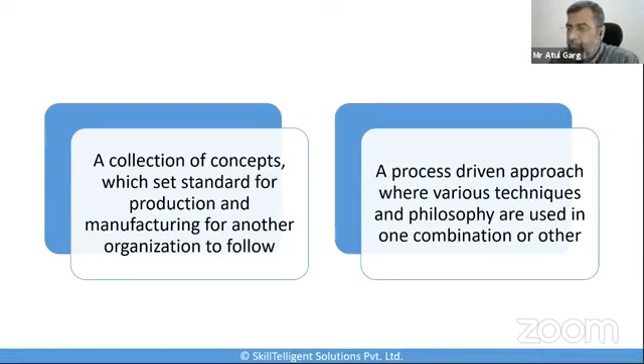Let's look at some of the best practices. World-class manufacturing tends to implement best practices and also invent new practices so as to stay above the rest in the manufacturing sector. The main parameters which determine world-class manufacturing are quality, cost-effectiveness, flexibility, and innovation. I think these parameters apply to almost every program meant to make you competitive. Whether it's operational excellence, manufacturing excellence, or world-class manufacturing, you will always end up focusing on quality, cost-effectiveness, flexibility, and innovation.

WCM implements robust control techniques, but there are 5 steps which make the system very efficient, and these are the ones you see on the screen. The first one is reduction of setup time and tuning of machinery. It's important that organizations are able to cut back the time in setting up machinery and also tune machinery before production.

The second step is that production processes should be divided according to their nature, with similar processes combined together - that's what we call cellular manufacturing. The third area is that the normal tendency of a manufacturing organization is to maintain high levels of WIP material. We know that increased WIP leads to more cost, while decreased WIP induces more focus on production and fast movement of goods. So the third area is reduced WIP material.

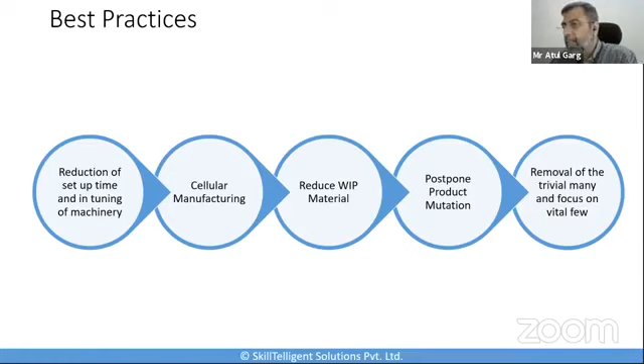A little bit of history: the term world-class manufacturing was introduced in 1984 by American industry strategists. They developed a model based on the study of Japanese, German, and American companies that had achieved performance levels beyond the known standards in their sector. Fiat developed this concept further in 2005 with the aim of improving the production system by reducing waste, increasing productivity, and improving working conditions.

Following these studies, a model for deployment of problem-solving tools, maintenance improvements, etc. was created. Hajime Yamashina, professor emeritus at Kyoto University in Japan, played a key role in the development of WCM. A 4-step strategy to achieve the world-class level by assessing the contribution of manufacturing activities to the competitiveness of the organization was developed by Fiat, Chrysler, Professor Yamashina, and so on.

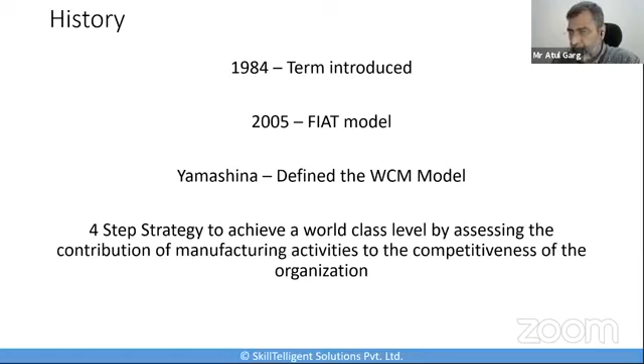As the Professor describes, world-class manufacturing requires total quality management as the brain, just-in-time as the nervous system, and total productive maintenance as the muscles. So in short, you need to develop a sustained ecosystem of excellent quality, delivery, and maintenance. That's in a nutshell what WCM is.

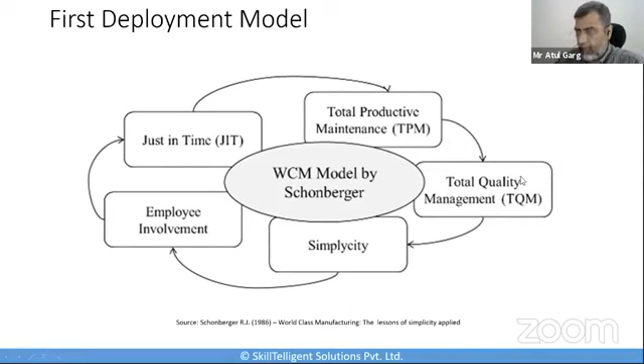Using this, there was a first model defined by a person called Schonberger, who established the first deployment model which could take you to the world-class level. Major components of this model were just-in-time manufacturing, total quality management, total productive maintenance, employee involvement, and a concept he called simplicity. So this was the Schonberger model.

Again, as we said a few slides before, WCM is a process-driven approach where implementation usually involves the following philosophies and techniques. I'll walk through some of these techniques.

Number 1, make to order. Second, streamline flow, small lot size, family of parts, doing it right the first time, cellular manufacturing, total preventive maintenance, quick changeovers, zero defect, just in time, and so on. These are the basic philosophies and techniques which have gone into building up the world-class manufacturing concept. I'm not going into detail because these are common concepts repeatedly used in different terminologies and philosophies.

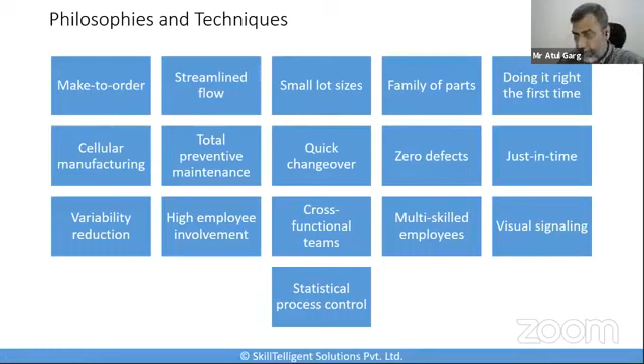Companies that have attained world class also acquire some common characteristics. Every WCM company is quality oriented without any doubt, and also has a flat organization. They're fast, flexible, and competitive in time. They remain customer satisfaction oriented, and these companies acquire an international perspective and constantly innovate in new product or service development.

World-class companies are also pioneers in technology. They create small units and continuously enhance the skills and knowledge of their employees. Continuous improvement is their way of life. These are some of the common characteristics which every WCM company ends up acquiring by default.

These companies adopt manufacturing organizational principles and focus on production requirements, representative manufacturing skills, automated manufacturing skills, and workforce skills. So that's another angle which these companies focus upon.

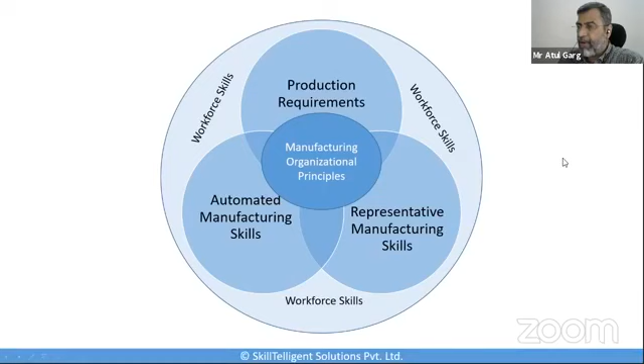Now let's talk about the 10 pillars of world-class manufacturing. To be world-class requires an overall willingness to establish closer connections with everyone, from customers and suppliers to workers, an unwavering commitment to self-analysis and improvement, and an aggressive approach to technologies that can help turn visionary strategies into gold medal realities.

As the WCM model was getting defined, they identified the 10 technical pillars of WCM. We'll talk about them quickly, each pillar I'll walk you through. The first pillar aims to reduce accidents at work, developing a culture of prevention, improving working conditions, and improving ergonomics. That's safety and health, the first pillar.

The second pillar is cost deployment. This is a priority in the WCM system because it helps in identifying the causes of losses, quantifying the potential benefits to save money, and putting in place the necessary resources by management. In general, it is about having real control of the losses of the company, and it is synergistic work between financial services and production.

Normally, in any large organization, the financial services and production usually operate at arm's length. But this particular pillar focuses on bringing them together and generating synergies between the financial services and the production area.

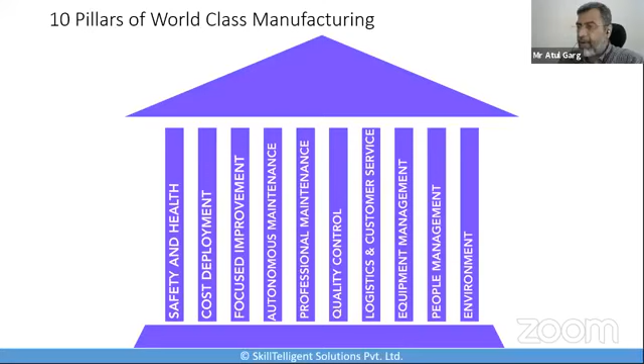The 10th one is the environment, which demands that companies respect environmental standards and develop a culture of cost reduction and energy losses. So these are the 10 pillars of world-class manufacturing.

As we go about implementing this, along with the 10 technical pillars, 10 management criteria or management pillars have also been identified to support these technical pillars. So we'll also quickly talk about these 10 pillars.

The first management pillar is management commitment. Commitment of management is an essential element to the success of any approach where you want to bring in improvement. Without this commitment, the project is doomed to failure.

The second one is clarity of objectives and KPIs. Each individual must be informed of the company's ambitions to understand their position, their role, and thus achieve their objectives.

The third one is route map to the WCM. The deployment plan must be built to make a clear link between the company's objectives and the actions on the ground. This is communicated and monitored by management.

Next is allocation of highly qualified people to model areas. Each pillar has a leader and a team dedicated to its implementation, and these people oversee creating and sharing know-how.

Commitment of the organization is the next one. Management and all the staff must be involved in the process. They must wish to see the problems and solve them.

Just one second. I think my video seems to be frozen. The video didn't freeze, sir. Yeah, just one second.

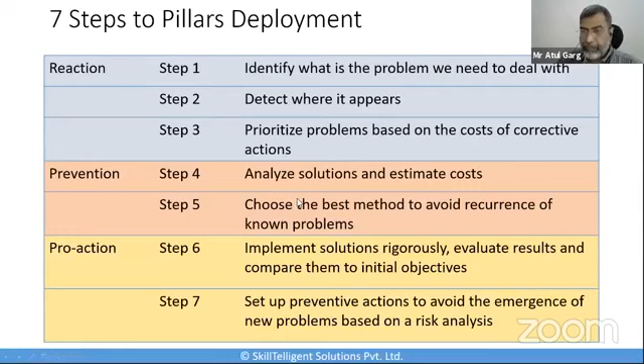Okay. Just a moment. Yeah.

So while we talk about these deployments, there are supposed to be 7 keys to becoming a world-class manufacturer. So let's understand these 7 keys. The first one is focus on the competitive quality. With constantly changing customer requirements, quality is no more a competitive weapon. Every organization has quality today. So we cannot say that my quality is better than others. You would go in the market and chances are you will find 2 products very close to each other in terms of quality. What separates a world-class organization from others is how much better you are than the rest of your competitors. So your quality has to now become competitive. So that's the first key.

Second, lean manufacturing is an overall methodology that seeks to minimize the resources required for production by eliminating the waste that inflates the cost, lead times, and inventory requirements. It also emphasizes the use of preventive maintenance, quality improvement programs, pull systems, flexible workforces, and production facilities. So implementing lean manufacturing is the second key to becoming a WCM. Companies with a lower operational cost structure will obviously enjoy the advantage in profitability and the ability to adjust pricing to meet competitive pressures if necessary to maintain or gain market share. So achieving cost efficiencies becomes the third key to becoming a WCM.

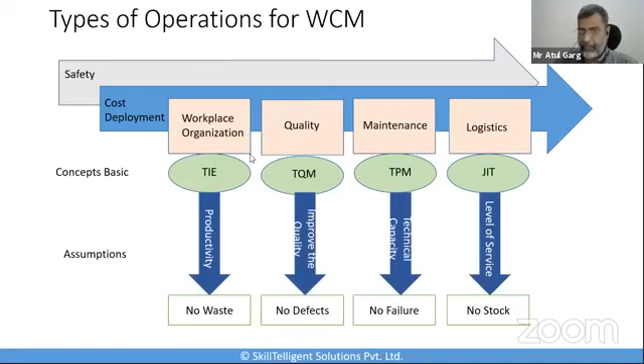So total industrial engineering. This is a concept which was identified by Professor Yamashina as a part of his WCM concept. It is a system of methods where the performance of labor is maximized by reducing Muri, Mura, and Muda, and then separating the labor from machinery through the use of sensor techniques. So the important part is, using industrial engineering, how do we improve the performance of the labor and how do we separate the labor from the machinery? Muri, Mura, Muda are the 3 important things which we talked about earlier in one of the webinars, how they help you cut through your losses overall.

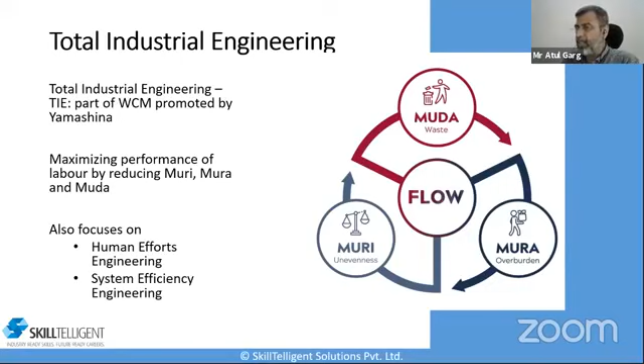Total industrial engineering also focuses on human efforts engineering and system efficiency engineering. Performance of the labor is the human efforts engineering, and separation of the labor from machinery is the system efficiency engineering. I'll cover this a little more in detail because this is not such a well-known concept. Most of the time people know TQM, TPM, JIT, but they don't know TIE.

So human efforts engineering would cover the principles of motion economy and motion study, work measurement, work sampling, ergonomics, safe work practice design, wage incentives, and job evaluation. And system efficiency engineering, on the other hand, addresses method study, methods efficiency, design, process and operation analysis, value engineering, statistics-based techniques, mathematical optimization, plant layout studies, engineering economics, and so on.

So these are 2 very important parts of industrial engineering, and having complete total industrial engineering is very important to ensure you have the right things which will help you improve the performance of your labor. So this is one component of WCM. Let's look at the second component, TQM.

TQM, total quality management, can be summarized as a management system for a customer-focused organization that involves all employees in continual improvement. It uses strategy, data, and effective communications to integrate the quality discipline into the culture and activities of the organization. There are 8 principles of total quality management; people use different words, but the concepts remain the same. First, customer focus. Second, total employee involvement. Third, process centered. Fourth, integrated systems, then strategic and systematic approach, continuous improvement, fact-based decision making, and communication. So these are the 8 principles of TQM.

I'm not sure whether you noticed one thing. Fact-based decision making, or the factual approach to decision making, is a very crucial part of the TQM as well. Okay, so that's TQM, which is the second component, or the type of operation which makes the WCM.

The third one we very recently talked about is the total productive maintenance, and TPM is a holistic approach to equipment maintenance that strives to achieve the perfect production. TPM aims for no breakdown, no small stops or slow running, no defects, and no accidents.

Again, TPM also has got 8 pillars, which are autonomous maintenance, planned maintenance, quality maintenance, focused improvement, early equipment management, training and education, safety, health and environment, and TPM in administration. So that's your TPM.

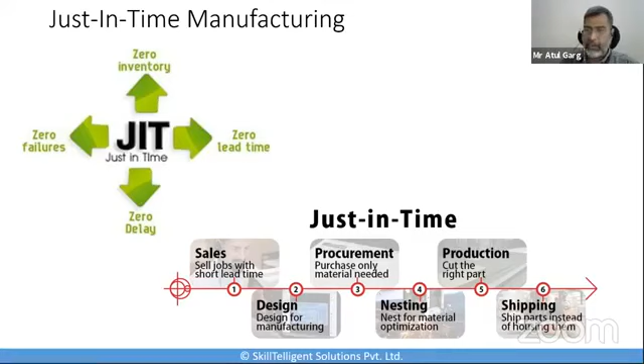I'm picking up a concept which we used earlier also in the Kanban. So when we talked about the Kanban, we had talked about a concept called the CONWIP, which is the constant work in progress. This system is more like the actual idea of using the supermarket shelves, where the Kanban is the actual location on the shop floor. So when a process removes the product from the previous process, the empty space is the Kanban, and the previous process will work to fill the hole.

So this system works very well for systems in which you can achieve near to one-piece flow and within which variation is limited. However, it also can be used very successfully within those areas in which there is a large amount of variation if combined with a make-to-order type approach to the planning. So the CONWIP or the Kanban type CONWIP is another factor which works along with the JIT. It's part of the JIT itself, and that also has to be part of your WCM overall.

So these are the 4 things which we talked about. So to build a proper world-class manufacturing, the concepts and methods of the total industrial engineering, total quality management, total productive maintenance, and just-in-time manufacturing must be deployed with focus on productivity, improvement of quality, technical efficiency, and level of services. These approaches should always result in zero waste, zero defects, zero breakdowns, and zero stocks.

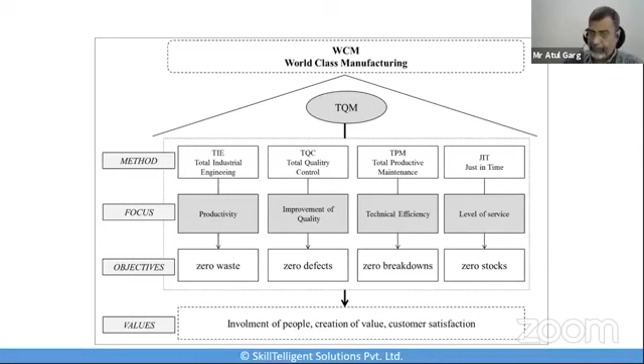So I was asked this particular question by somebody somewhere: are there any kind of levels of this world-class manufacturing? Yes, there are. So Fiat Chrysler Automobiles actually has developed a structured WCM audit mechanism. In 2005, they were the first one to start recognizing this as a structured approach of implementing WCM into their own thing. In 2009, when Chrysler joined Fiat because of the purchase of the majority of stakes by Fiat, they also went into this, and WCM actually became a turnaround story for Chrysler.

So what they did is they have also come out with a world-class manufacturing structure, and they have defined the 4 levels of world-class manufacturing. They rank them as bronze, silver, gold, and world-class. The main parameters which determine world-class manufacturers are quality, cost-effectiveness, flexibility, and innovation. We have talked about it earlier. I'm just repeating that again.

World-class manufacturers implement robust control techniques, but there are 5 steps which will make the system very efficient. The evaluation here is done on a scale of 1 to 5. Each node meets a specific criteria, and each technical pillar and management criteria is evaluated using this scale.

Okay, adding the scores results into a medal. So the first level or the first medal is the bronze medal, which requires a score of 50 to 59 points. At this stage, if you're in a bronze medal, you should be able to demonstrate significant gains and create a know-how on reducing the cost and problems. For example, you should be able to say that I'm able to reduce my quality problems by 3 times, I'm able to reduce the cost by 10 to 20%, or my lead time has been reduced 2 times. So that's the first level of the WCM overall.

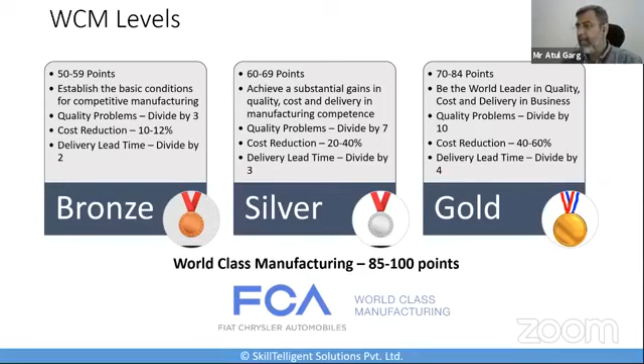Okay. The last level is world class with 85 to 100 points. What this will mean is that the company has reached a higher level in our industry, and it has become benchmarkable. The company has successfully rolled out the entire process across the company, and gains are widely visible. And now other companies are able to benchmark against us and say that if this company does it to this level, I am at 40, 50, 70, 80% of this particular company. So we become the benchmark. So that's the fourth level, and that's where you are truly a world-class manufacturer. Okay.

So there are several tools to measure and record the progress, and since WCM influences all the production and logistic processes, there is a complete audit system and measurement with the relevant indicators which have been identified. The main goals remain to maximize the production system results within the framework of the logistics program and in accordance with the assumed quality goals, and to strengthen competitiveness through the continuous evaluation of the production system so as to eliminate the losses in all the processes. The scope of no losses should include no accidents, no defects, and no failures. And the third goal is continuous improvement of skills, competency, and knowledge of employees, which is necessary to solve problems by means of WCM methods and tools.

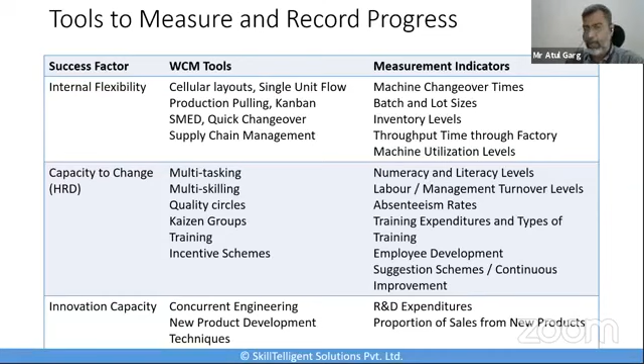Okay. Now, this is another angle which has come in. So there obviously cannot be an absolute world-class manufacturing standard because each industry is different. Okay, so the WCM opportunities will vary enormously from one industry to the next. So I cannot just say that I am the best. I'll have to judge my company's performance against the other companies and do a benchmarking.

That's where the world-class manufacturers with a score of 85 to 100 actually become the benchmark for the other industries to go by. So, the best way to score the checklist: we have got a checklist over here for the WCM. And the best way is to score this checklist by a group of senior managers from the key departments, plus the production operators, to go through this, identify, and then go through the questions. I'll just give you the sample questions as well, and agree on where we are.

Okay. Some of the answers may not be unanimous answers. In that case, you have to do a voting and decide what is the most favorable or the most preferred answer in that particular case. The value of the checklist which we prepare is as much the value of the discussions as the answers. Okay. So what is vital over here is that the same group gets together at least annually, or at a fixed frequency, to discuss the progress since the last time.

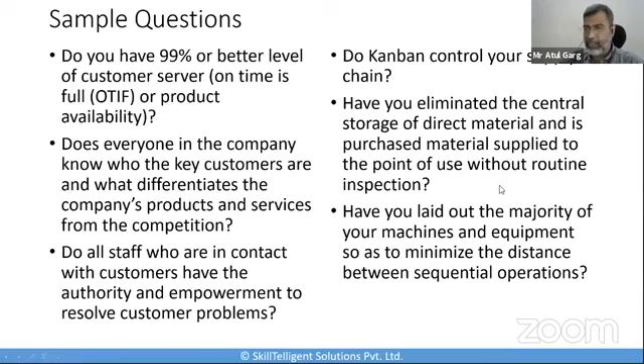Okay. So I'll share some of the sample questions. These are some of the sample questions which can be used to ascertain your class. The first question is on customer service and it requires a percentage, but the rest of the questions require a graded answer, right? As I have said earlier, these are subjective questions and they keep improving as your company's status also changes. So I'm not going to go through these questions; I'm just flipping through them. I'll wait for a few seconds so you can have a look.

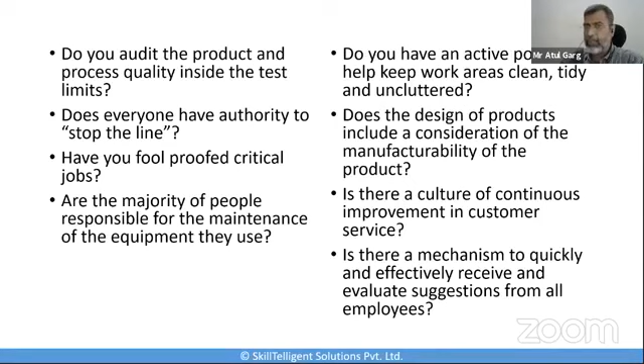But these are very simple questions focusing back upon the same things: quality, productivity, maintenance, just in time, industrial engineering practices, foolproofing, all those similar things. Okay. So I'm sure one of the questions which will obviously come in is: who are the WCM companies? And are the WCM companies only automobile or engineering companies? So let me just go back a little and talk about it.

This discipline of world-class manufacturing actually appeared for the first time around the mid-80s, 1984 to be very specific. And this was counted as a collection of best practices. And these best practices, 95% of them, came from the Toyota production system. Toyota was the pioneer in all these things. Now, much later, probably in 2005, WCM assumed a higher role in the global community. That is the time the Fiat Group Automobiles adopted this entire WCM program to create a new way to be competitive in manufacturing.

So obviously, since the Fiat group created it for themselves, they had mostly automobile companies, auto parts manufacturers, or steel companies as part of this entire consortium who went through WCM. But over a period of time, these practices were found to be useful even for other industries.

Companies as varied as the Royal Mail, a mail services company, Ariston, the manufacturer of white goods, Unilever, a consumer goods company we know as Hindustan Unilever, Atlas Copco, the industrial tools manufacturer, and even a food company called Barilla, a pasta manufacturer, along with different transportation industries, they all started using the WCM concept and became WCM in their own area.